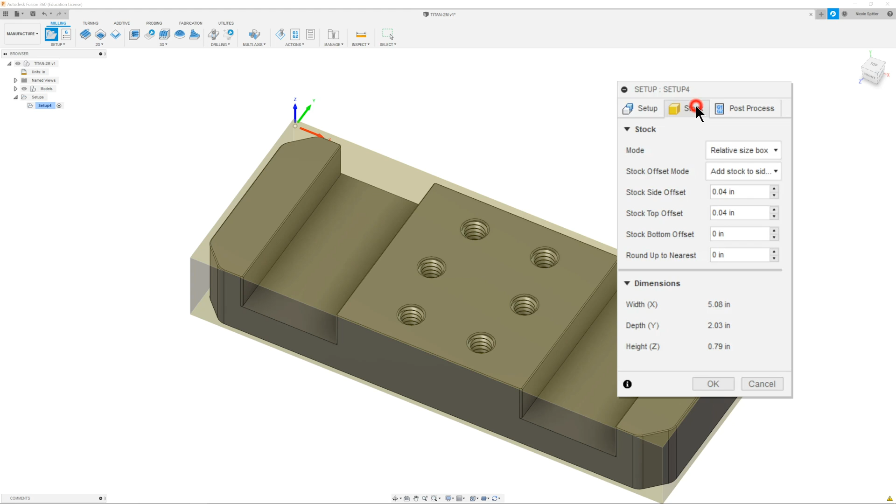The next thing we need to do is go to our stock tab, and we need to make sure our mode is set to relative size box, and we're going to change our stock offset mode to add stock to all sides. I'm going to add 0.05 to our X and 0.025 to our Y. I'm going to do 0.23 for our negative Z offset and 0.02 for our positive Z offset. So your dimensions should show 5.1 by 2 by 1. And we'll go ahead and click OK.

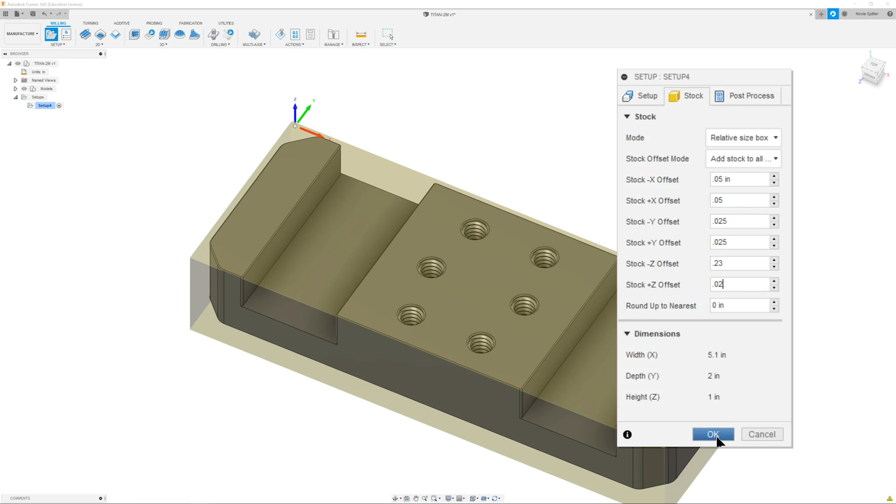The next thing we need to do is face our part. So to do that, we're going to come up to 2D and down to face. We're going to select our tool from the building blocks library, and we're going to use that 1.5 inch face mill that we created in the TITAN-2M video. I'm going to change my RPM to 4,000 and our cutting feed rate to 20. I'm just going to change all of these to 20, and we're going to move on to our geometry tab.

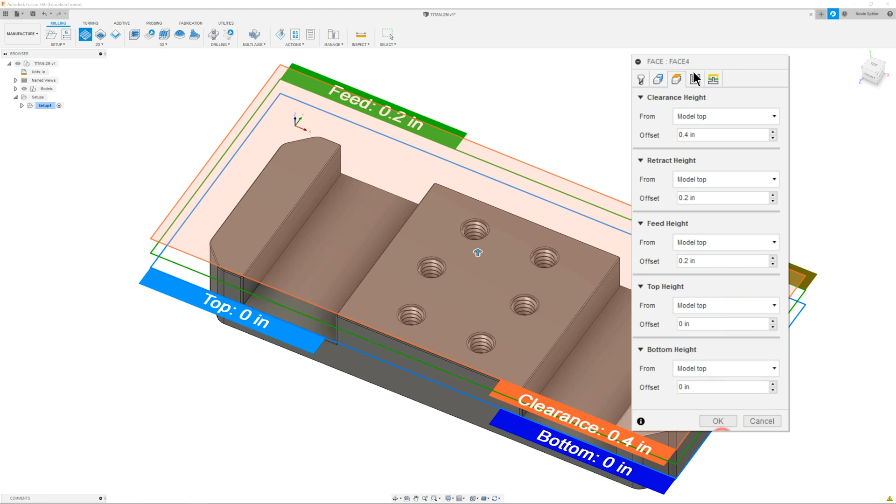I don't really need to select anything in here, so let's just go straight to heights. In here we need to change everything to model top. And now we can move to our passes tab. In here I'm going to change my pass direction to 180 degrees, my pass extension 0.76, and my step over is going to be 1.4. The direction I'm going to set to climb. And then I'm going to move on to our linking tab. In here, I'm not really going to change too much. I am going to turn off our lead in and our lead out and click OK.

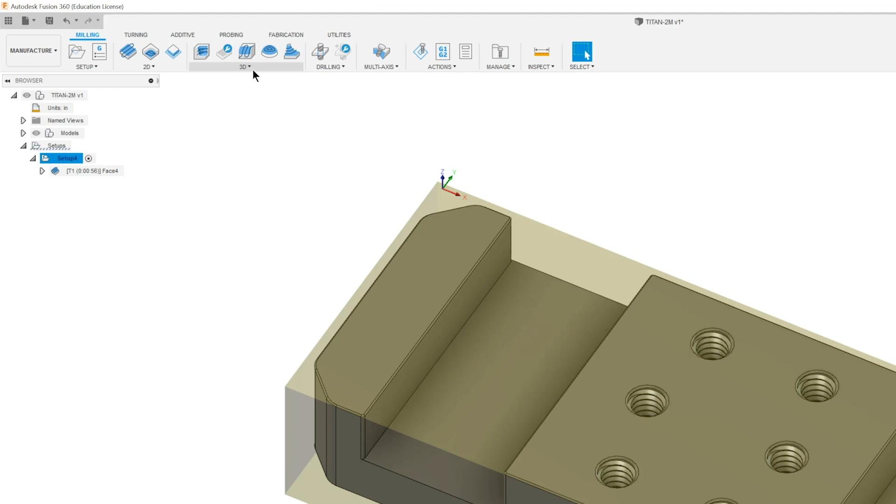The next thing we need to do is rough out our part. So to do that, I'm going to come up to 3D and we're going to go down to adaptive clearing. In here, I want to select our tool from the library. We're actually going to be using a 1/2 inch flat end mill this time. And we'll click OK. I'm going to do 4,000 RPM and I'm going to do a 25 inch per minute feed rate. We'll do our lead in and lead out 25. I'm going to do 15 for our ramp and our plunge.

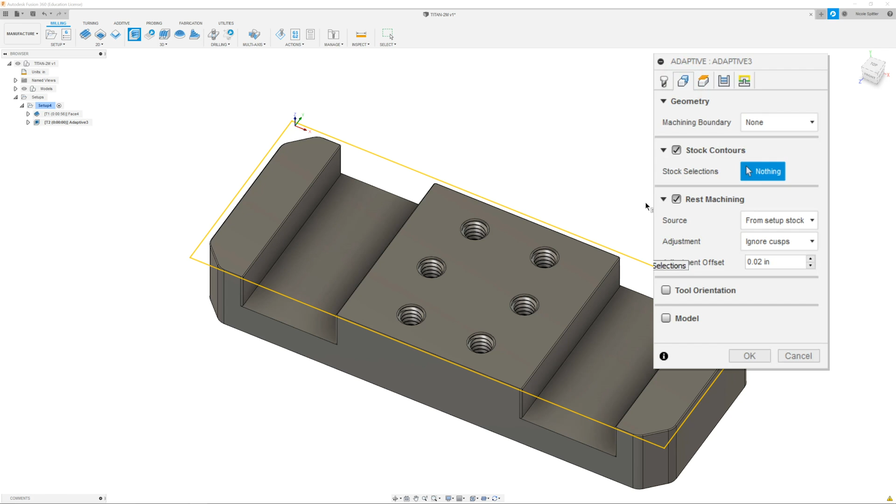I don't really need to select anything in geometry, so I'm just going to leave this and move on to our heights tab. In here, I want to change everything to model top. And our bottom height offset is going to be negative 0.77. In our passes tab, I want to change our optimal load to 0.025. And I'm going to change our maximum roughing step down to 0.8. I'm going to select the box that says flat area detection. And I'm going to change our stock to leave to 5 thou.

Next, we'll move over to our linking tab. In here, I want to change our retraction policy to minimum retraction. We're going to change our stay down level to 70%. And I'm going to change our ramp type to plunge. And we'll set an entry position in this corner along this edge here. And click OK.

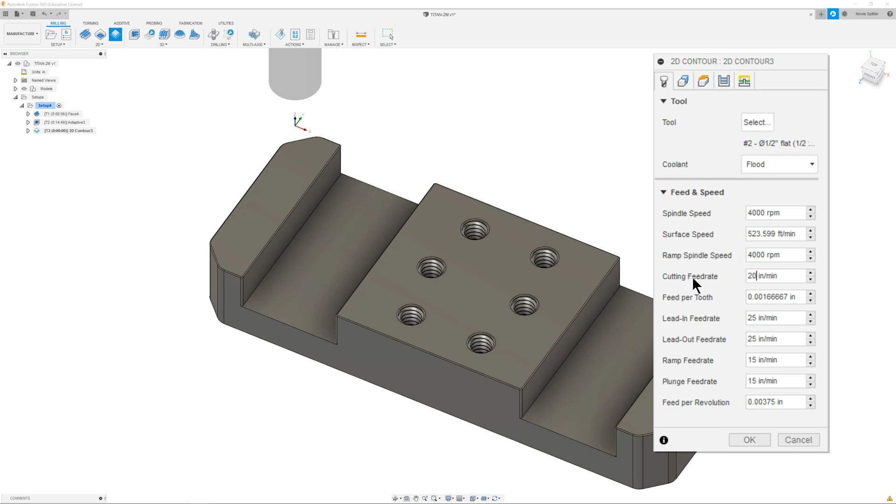So the next thing we need to do is finish the outer profile of our part. So to do that, we're going to come up to 2D and down to 2D contour. Now we're going to be using that same 1/2 inch flat end mill, but I am going to change our feed rate to 20 inches per minute. I'm just going to change them all to 20. In geometry, I do want to select this outer profile on the bottom here. And in our heights tab, we just want to make everything model top again.

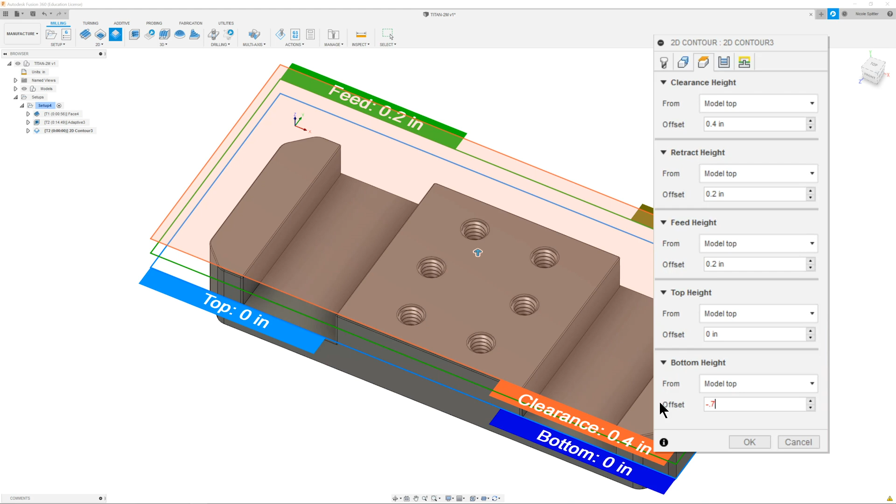Our bottom height offset is going to be -0.77. And then we can move on to our passes tab. In here, I want to change our compensation type to wear. And we can actually add in a finishing overlap of 10 thou.

Next, in our linking tab, the only thing I really want to change here is just going to be the lead-in sweep angle. We'll make that 45 degrees. And we'll go ahead and add an entry position, same one as last time in this edge here. Next, we'll click OK.

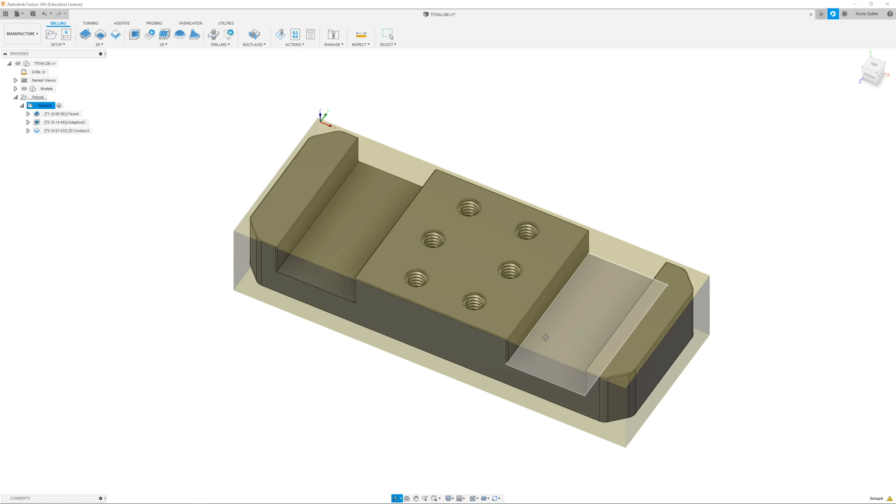Now the next thing we need to do now that we've finished the outside of our part is finish our pockets. So to do that, I'm going to go ahead and duplicate this contour. I'm just going to right click it, click duplicate, and then I'm going to right click the new one and hit edit. I'm going to use the same feeds and speeds and the same end mill, so I'll leave that alone. I'm going to move on to our geometry tab and I'm going to clear the current contour selection.

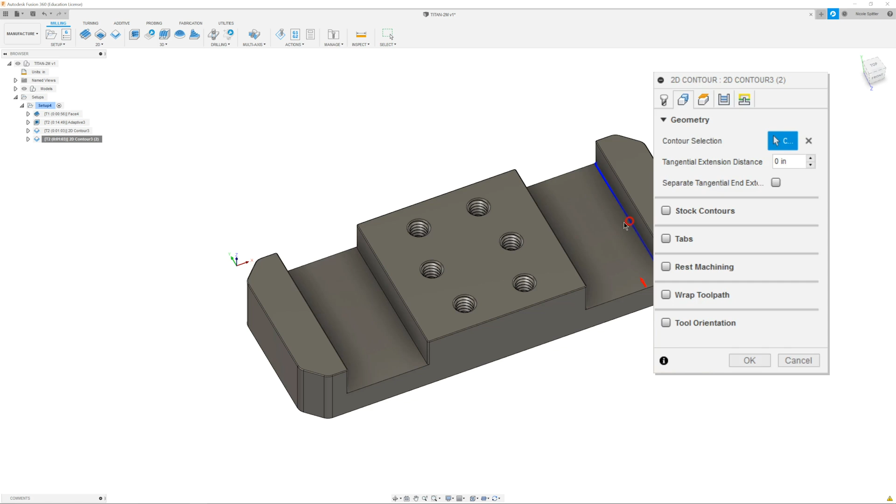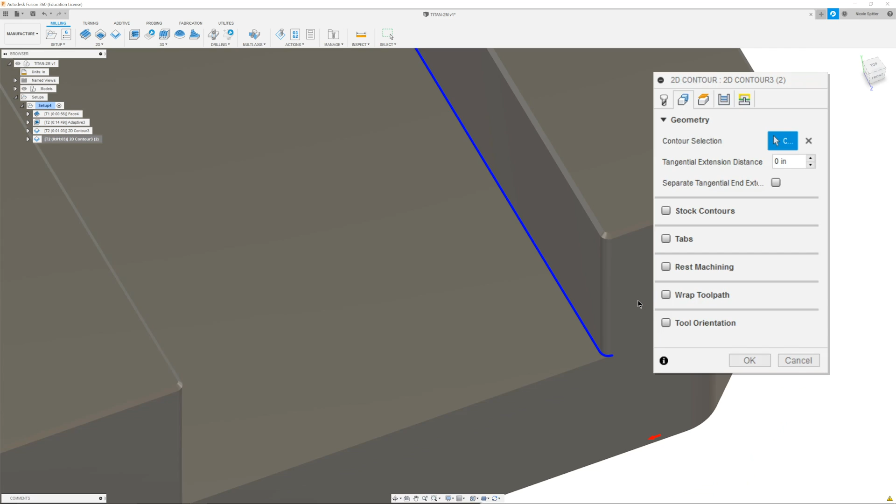So I want to select the right edge of each of our pockets here. You'll notice when I select one of them, it wraps around this radius here, but it doesn't select this one. So to select it, I'm just going to click that line again and it should highlight light blue. Now we can edit the contour. I'm going to select this radius that I want to add and then hit the little plus button that says accept current contour. And then I'm just going to do the same thing on the other side.

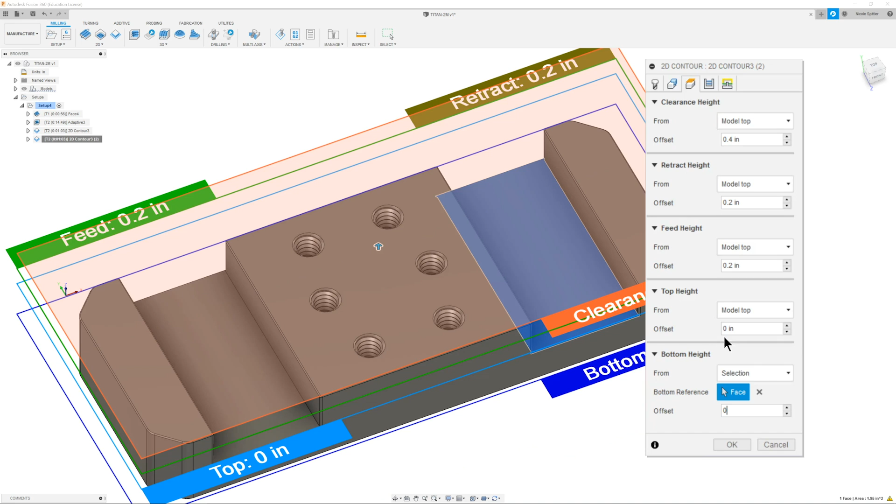Perfect. Now with those selected, I can move on to our heights tab. Everything's already set to model top. I do want to change our bottom height offset here. We're just going to change it to selection, and I'm going to select this face, and I want to change our offset to 0.

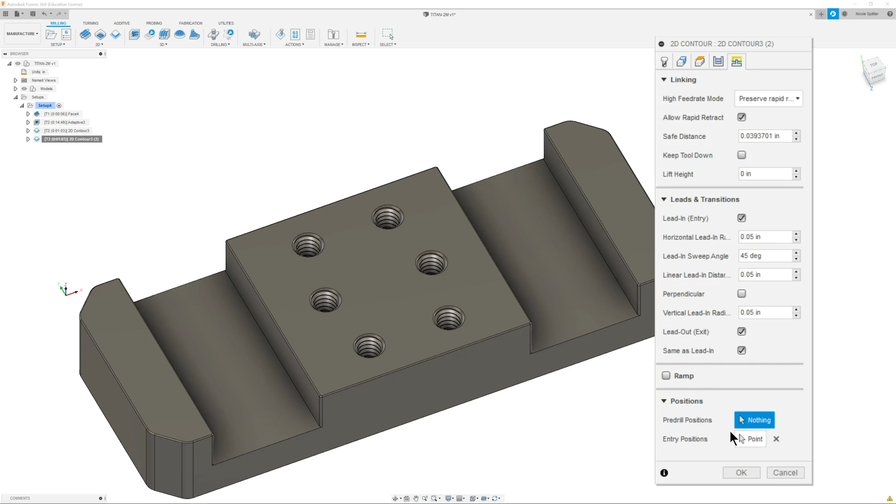Next, in the passes tab, there's not really much I need to change. I don't want a finish overlap here, and I actually want to add in roughing passes. We do want our step over to be 0.25, and now we can move on to our linking tab. There's not really anything in here I'm going to change. I do want to get rid of our entry position though. After I close that, I'm going to click OK.

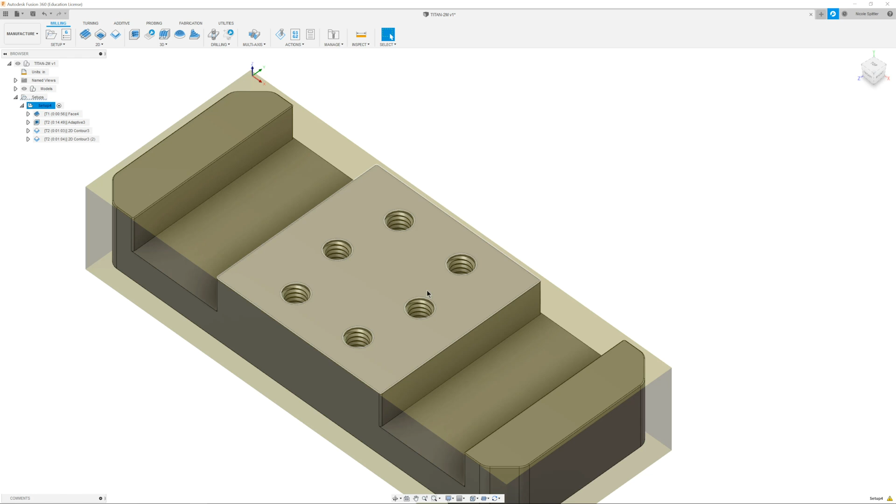So the next thing we need to do is the other side of our pocket. So it's going to be the exact same thing, only on the other side. So we're just going to duplicate this. I'm going to right click, click duplicate, right click edit, and we're going to change our geometry. I want to remove the current contour, and we're going to have the same problem on this side. So I want to go ahead and select the line, select it again, add our radius, and click accept.

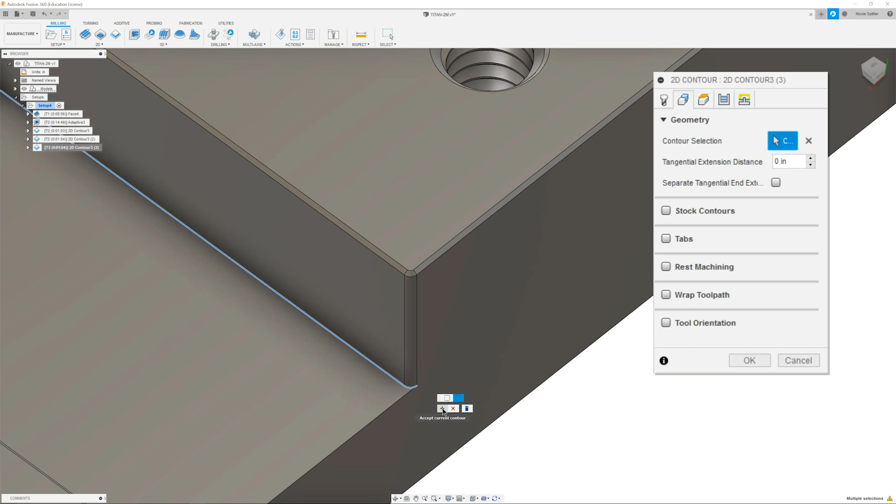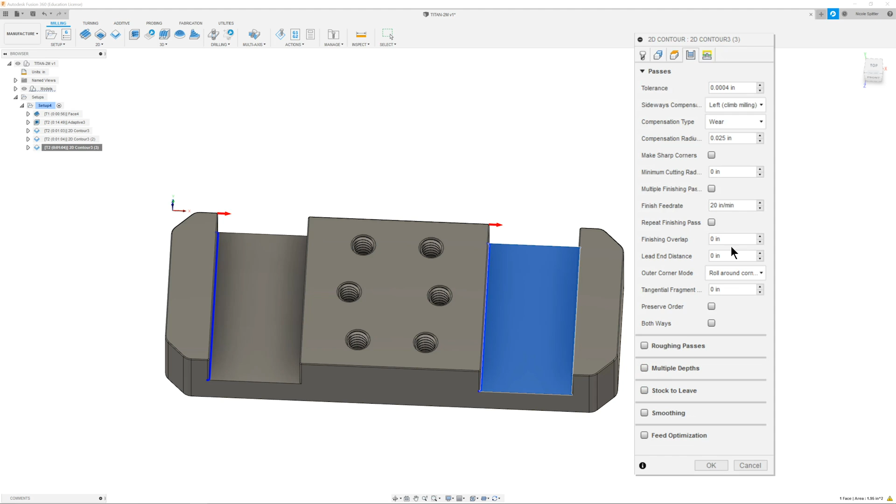Perfect. Now we'll move on to our heights tab. Everything looks good in here already. I don't really need to change anything. We'll move on to our passes tab. In here, I need to uncheck roughing passes. We don't need to do that extra pass. Everything else looks good. Linking tab, don't need to change anything in here. Go ahead and click OK.

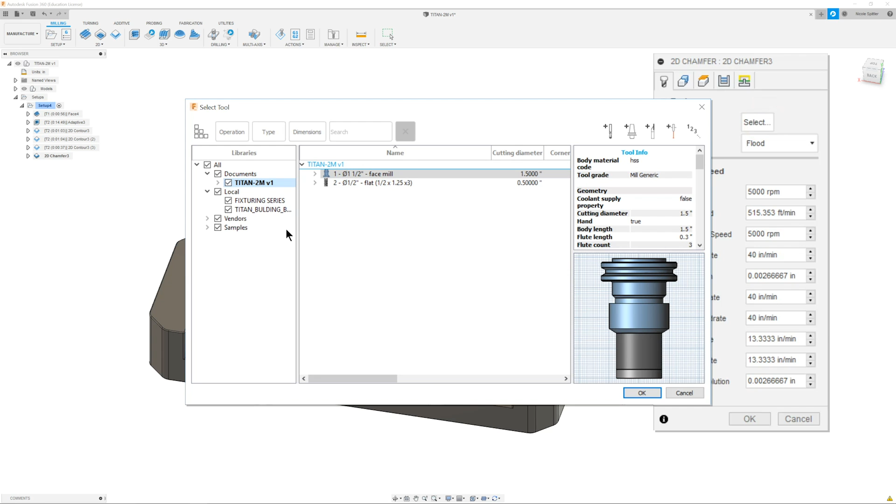So the next thing we need to do is chamfer the top edges of our part. So to do that, we're going to come up to 2D and down to 2D chamfer. Now we're going to select our tool. In our library, it's going to be the 3/8 chamfer. Go ahead and select OK. We are going to run it at 4,000 RPM with a cutting feed rate of 20 inches per minute. I'm just going to go ahead and change all of these to 20.

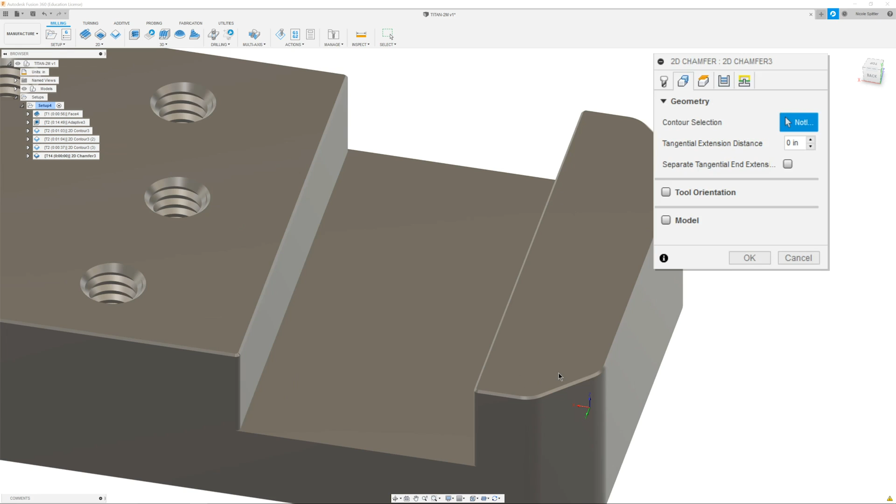And in our geometry tab, I want to select the top edges of our part. You just have to make sure, since the chamfer is modeled in, that we select the very top edge and not this bottom contour here. So if we were to select the bottom one, it would definitely mess it up. There we go. Now in our heights tab, we just want to change everything to model top.

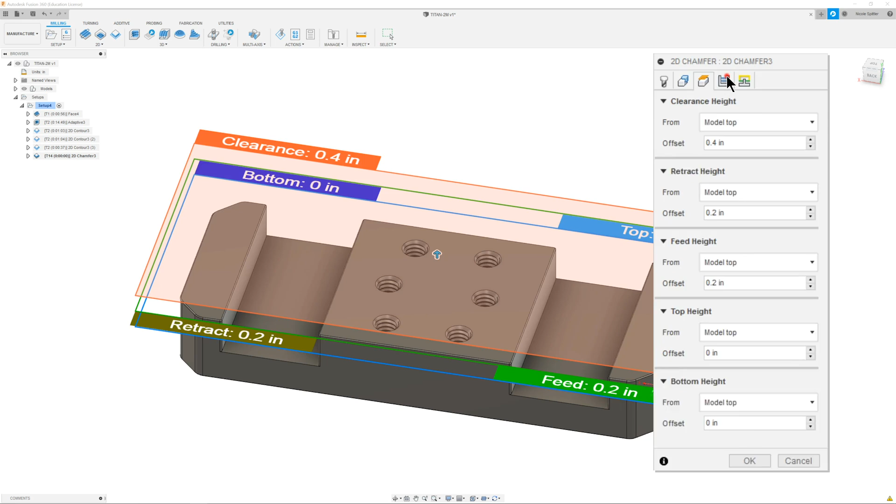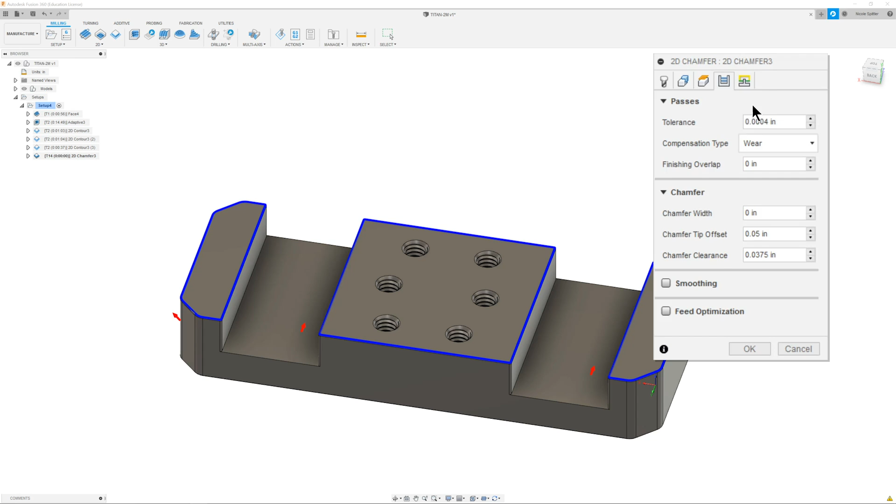Now we can move on to our passes tab, and I want to change our compensation type to wear. And we're going to actually change our chamfer width to 0 since the chamfer is modeled in. If it wasn't modeled in, I would add the width, but since it is, it's just going to be 0. The tip offset, we're going to do 0.05, and I'll go ahead and just leave the chamfer clearance in there. That's good. Move on to our linking tab.

In here, I want to change our horizontal lead-in to 0.075. Our angle, I'm going to do 45, and then I'm going to change our vertical lead-in radius to 0. And we'll click OK.

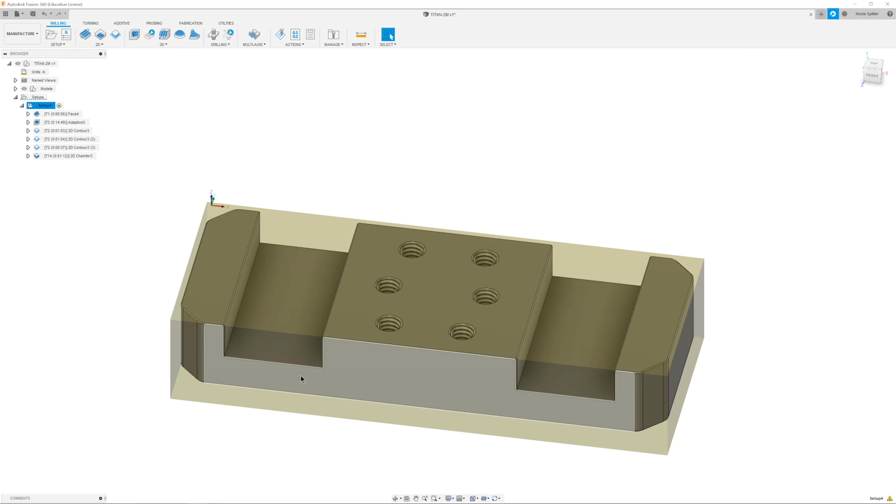The next thing we need to do is chamfer the bottom edges of our pocket. So to do that, I'm just going to duplicate this last toolpath, right click duplicate, right click edit, and we're going to use that same tool, same feeds and speeds, so that's all good. In geometry, I do want to remove our current contour selection, and I'm just going to select the 4 edges of our pockets here.

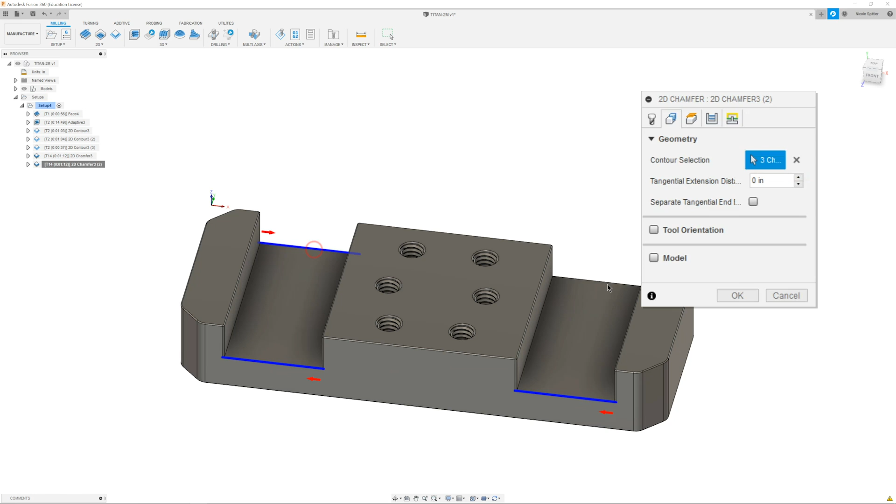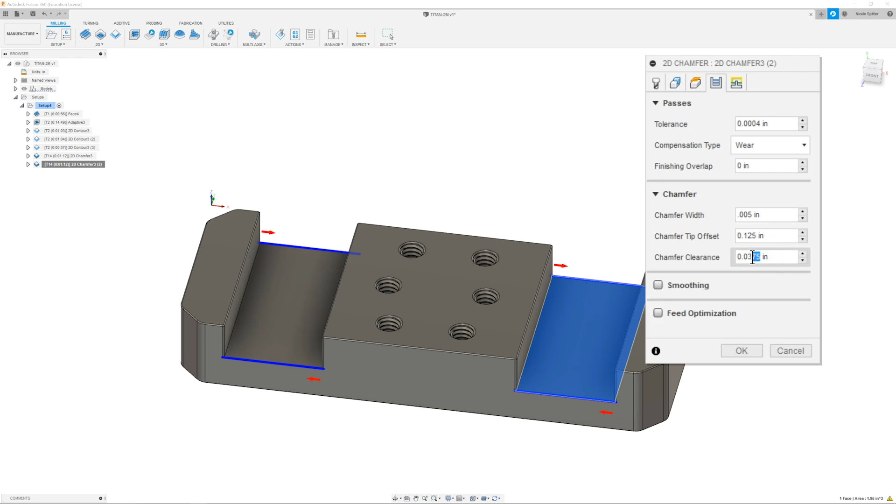In our heights tab, I am going to change our bottom height from selection, and I just want to select the bottom face of our pocket, and now we can move on to our passes tab. In here, I do want to add a chamfer width since it's not modeled in. I'm just going to do 5 thou. Our chamfer tip offset, I'm going to do 0.125. And our chamfer clearance, I'm just going to do 0.02. And in our linking tab, there's not really anything I need to change. I'm just going to leave that alone and click OK.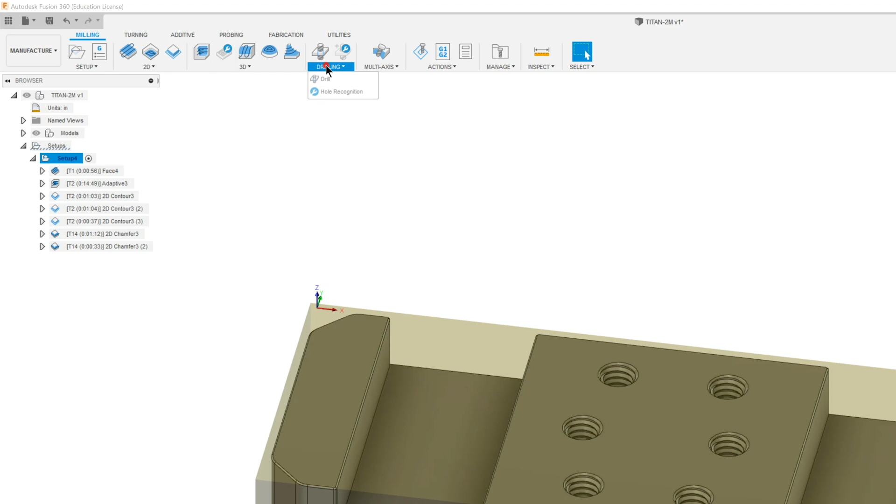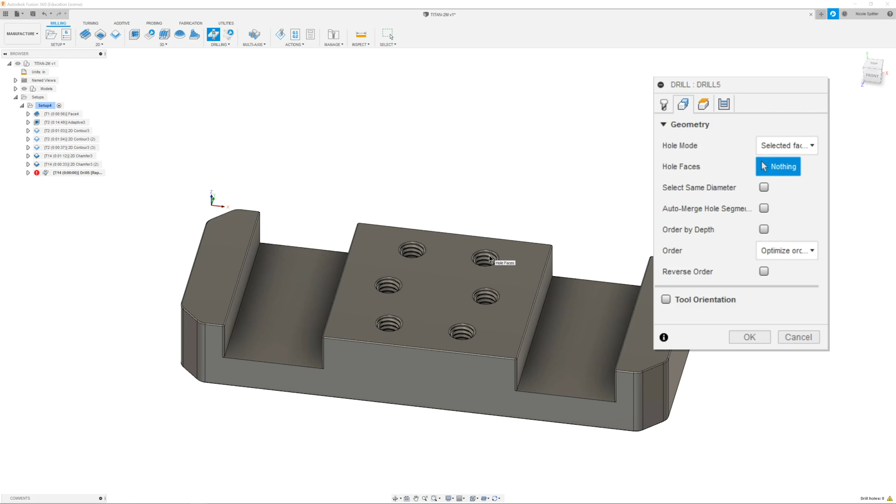The next thing we need to do is spot drill all of our holes. So to do that, we're going to come up to drilling, select drill, and we're going to use that 3/8 chamfer. So I'm going to leave it in there. It's going to be 4,000 RPM with a 20 inch per minute cutting feed rate. And we're going to move on to our geometry tab. We want to make sure our hole mode is set to selected faces, and with our hole faces highlighted blue, I'm just going to select one of these holes here. Next, I want to make sure the box that says select same diameter is checked. And now we can move to our heights tab.

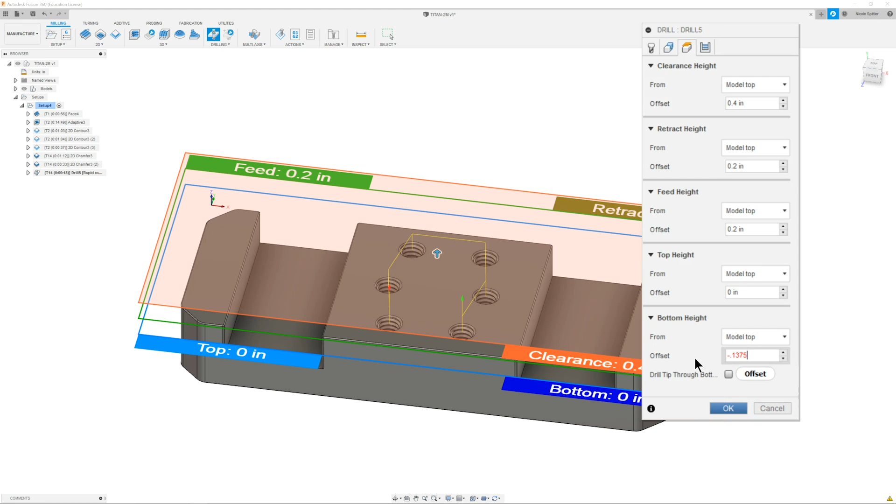All of these need to be changed to model top. And our bottom height offset is going to be -0.1375. And we're going to change our cycle type to deep drilling with a full retract. And I'm just going to do our peck depth of 0.04 and click OK.

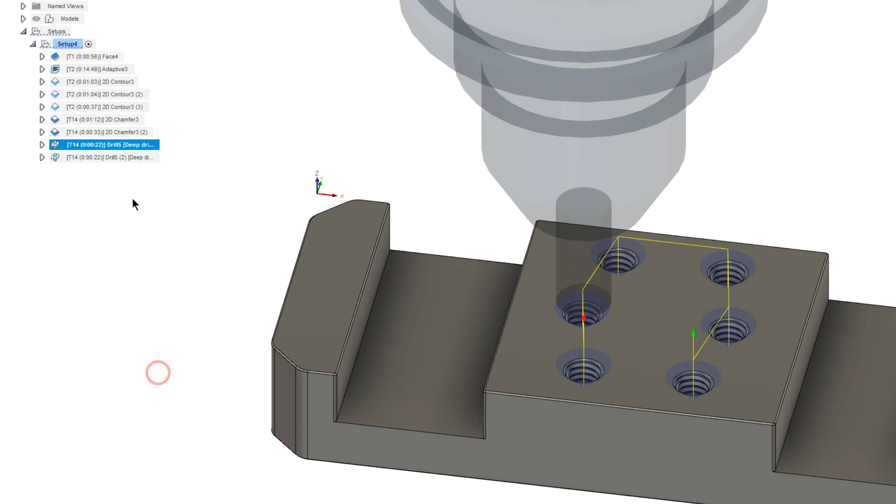Now we need to drill all of our holes, so I'm actually just going to duplicate that last toolpath. So right click, duplicate, and right click, edit. Now I need to change our tool. We want a drill. So in the library, we're going to use the 0.2283 drill and click OK. 4,000 with a 16 inch per minute. That's perfect. Our geometry is already selected, so I don't need to do anything there.

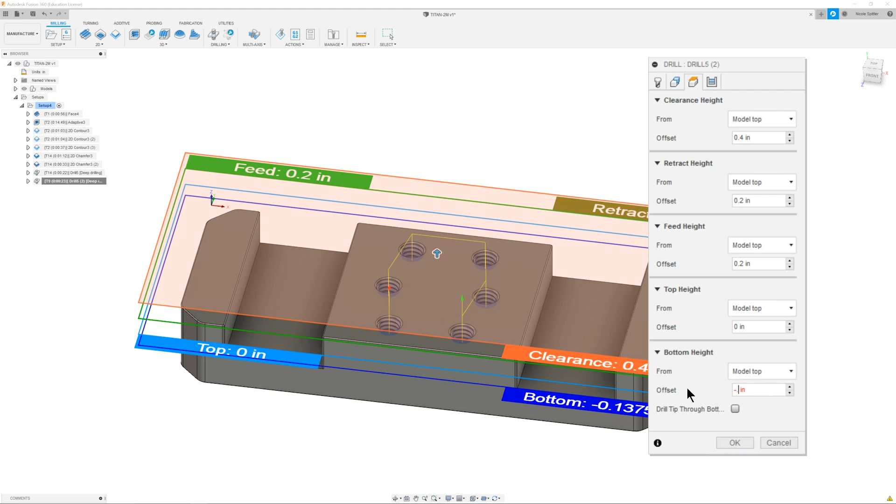In our heights tab, the only thing I really need to do is change our bottom height offset to -0.65. In our cycle tab, I'm going to change our cycle type to chip breaking with a partial retract. I want to do our pecking depth of 0.075, our minimum pecking depth 0.05, our accumulated pecking depth is going to be 1 inch, and we'll do a chip break distance of 0.01 and click OK.

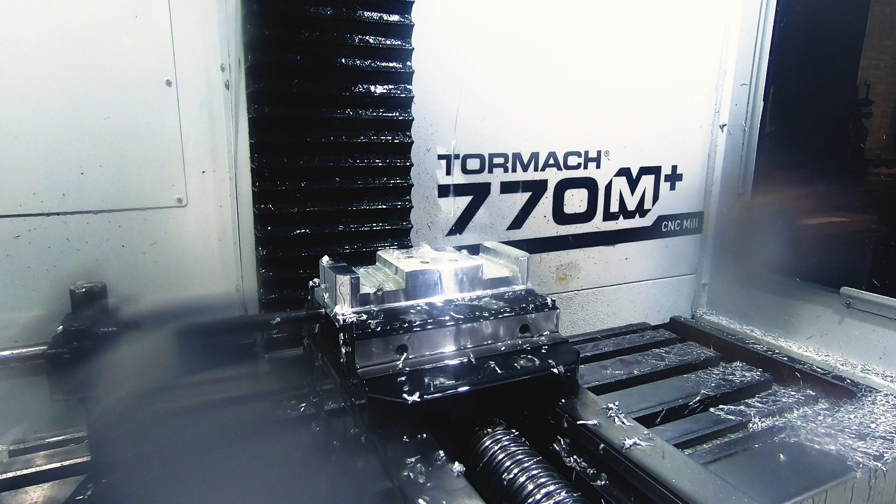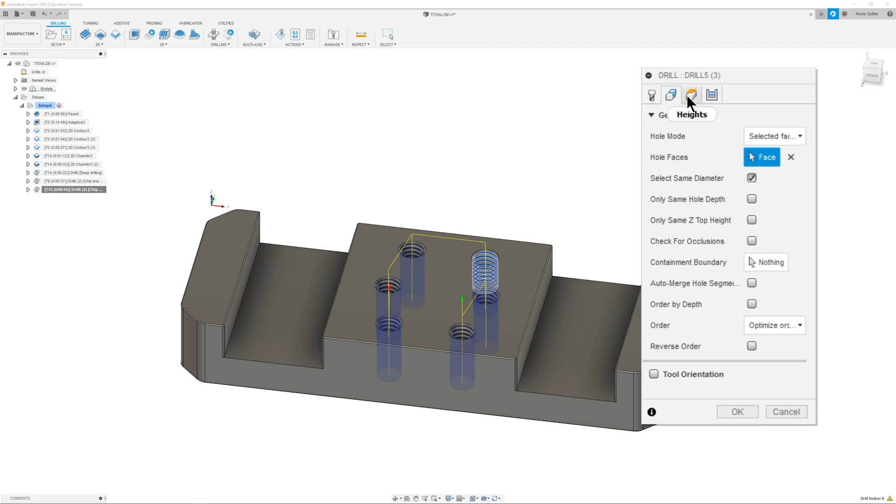Now the last thing we need to do is tap all of our holes, so we're going to go ahead and duplicate that last toolpath again. And right click, edit. And we're going to change our tool. We're going to use the 1/4-20 tap and click OK. We're going to change our RPM to 550. Our holes are already selected, so I don't need to do anything in the geometry tab. In our heights tab, I do need to change our bottom height offset to -0.5. And in our cycle tab, I'm going to change our cycle type to right tapping. And we'll click OK.

This part is now finished being programmed.